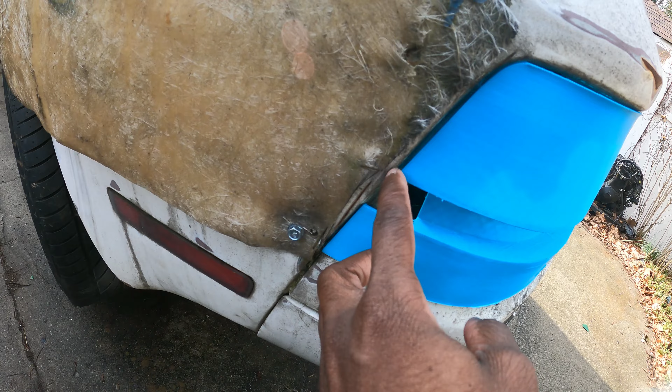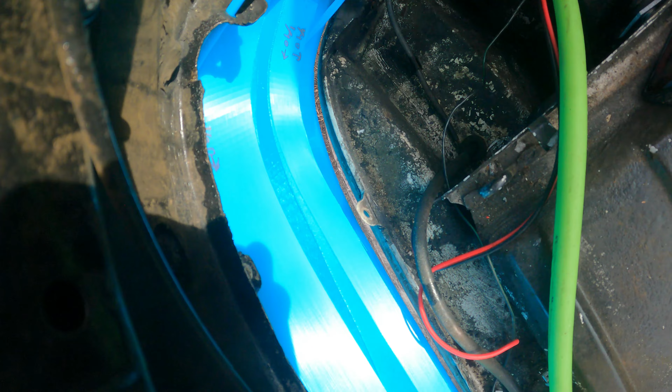So let's go, you can see you are looking at greatness here. Everything I do is greatness, of course. So if you guys remember, long time ago we were actually working on a kind of futuristic design for the taillight scheme. You can see we have a slit here going across, and then I had a center taillight, but it's not here right now with a slit in it. That slit housed a flexible - well actually, I think it was like a straight one - basically like one of those LED light tail bar kind of things for trucks, to give this thing a futuristic straight line look. Again, just like the wide body, bringing it to look more like a 992.

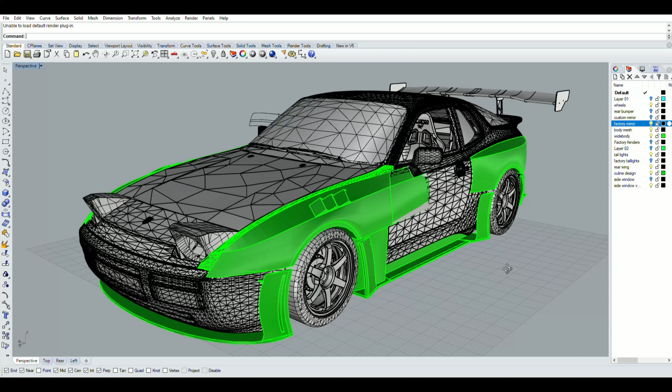So this is basically what we're coming up with. This I think is iteration 5, you know what I mean? Like a little embarrassing, but if I had a 3D scanner it would have been done probably by number 2. So this one is not perfect, but this one is damn near there. So you can see we have a nice 3D printed tail light, obviously to mimic this, except we're going to put our bar a little bit lower to match up with the body lines and the wide body.

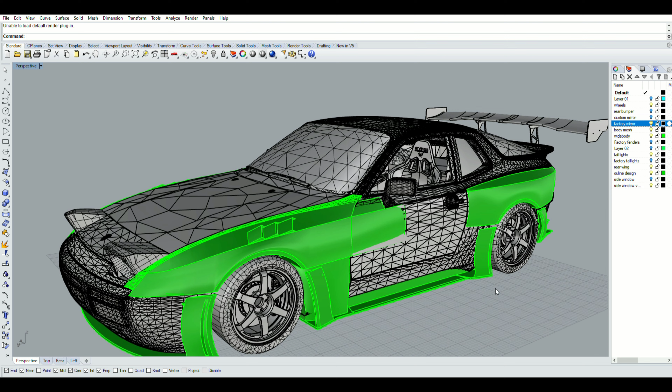So I actually have the strip, I just have to go get it, but you guys will see when it's done. The main goal of this video is to actually print the entire section and basically bring it onto fiberglass, and then carbon fiber, and bring on the molding process. So looking further at this, you can see we have a little air gap here. I'd like to tighten that up.

You can see we have all of our contour lines very nicely. I actually want to bring this edge out a little bit more, but we're not gonna get it super perfect in terms of the 3D print because it does warp and this, that, and the third. So the best thing to do would be to get it as best as we can, and like I said earlier, get it to the molding process.

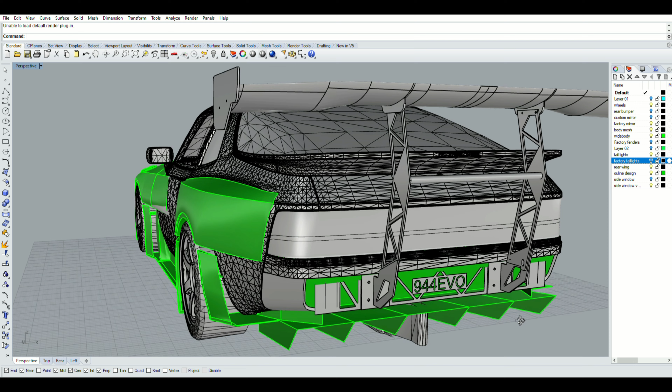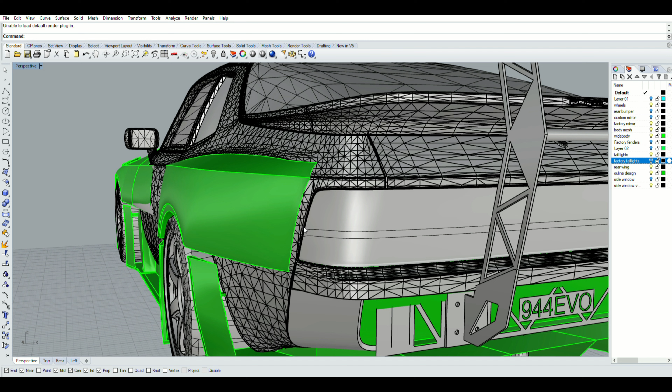So we're gonna fiberglass it and make it one whole piece. That way, if you guys want to actually purchase one of these, you guys can - it'll be a reusable mold. So you can see we have to tighten up this inner corner right here, and yeah, that's about it. You see we have mounting holes, everything's basically lined up, just have to adjust the holes a little bit, and yeah, not really much else to say, honestly. Just have to fix this one up.

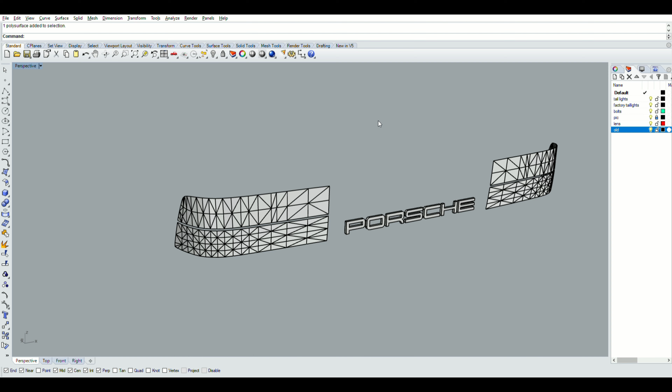I'm almost sure that my next one would be the last one, and then after that we can mirror it to that side, and then from there the center section will be easy. All we do is extend this all the way and take measurements after both sides are in. So without further ado, I guess let's hop on the computer and show you guys what we have here.

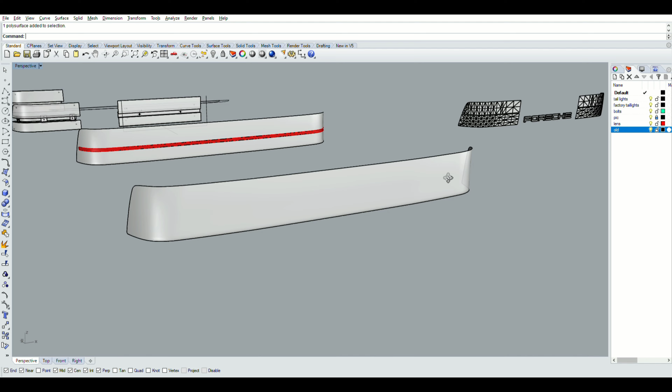Alright guys, back here again, back in our 3D modeling fantasy world. If you guys didn't know, I like to use Rhinoceros 5. Everybody uses Autodesk Fusion 360, honestly I don't see the hype against it. I mean it's cool, but you know, I prefer more abstract stuff like this.

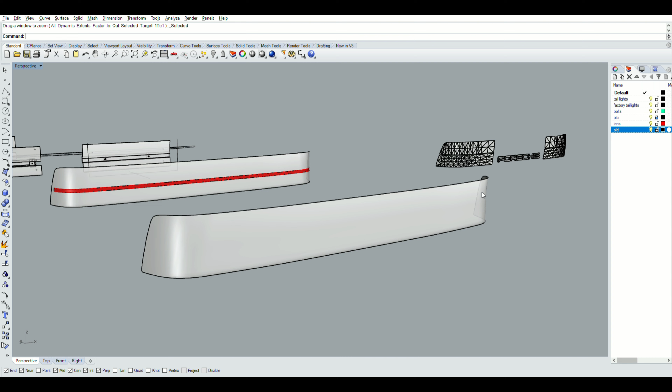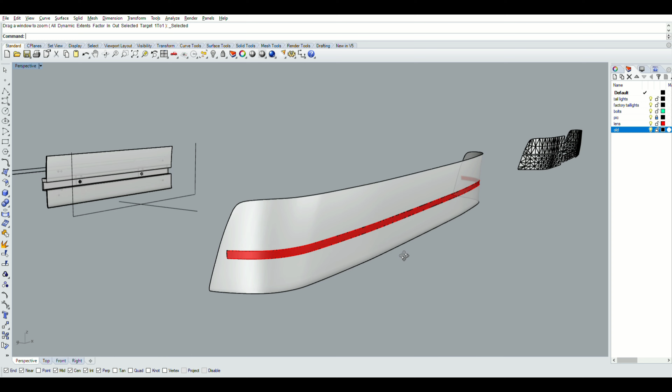So you can see we're bringing the car further into the whole 992 look, and honestly, I'm liking it. Some people may say it looks kind of cyberpunkish, but I like it, honestly. It's gonna be a straight strip just like the 992s. I'm thinking about putting a Porsche emblem here. Think about it, I don't know yet, but we'll see.

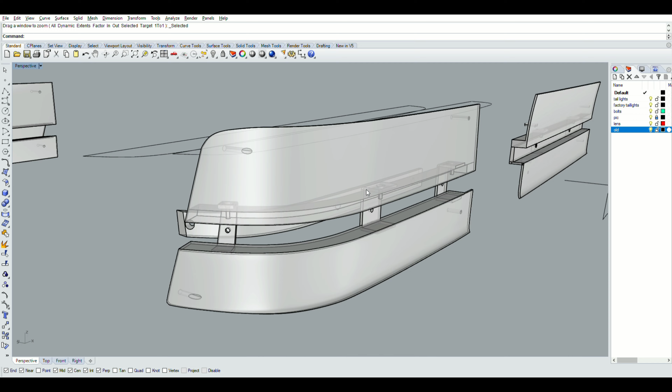These two lines are not gonna curve. I actually don't know why it's curving in the model, but these are complete straight lines, and you can see they will match up with the body lines of these slats here. So honestly, yeah, let's go ahead and isolate this and actually turn this into a real thing here.

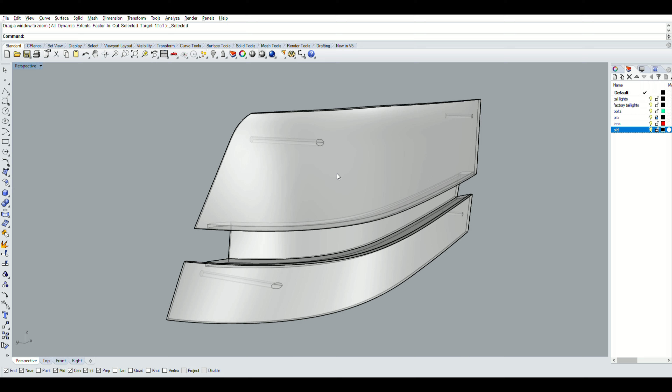Alright guys, you can see we've now isolated everything. This is actually the stock taillights taken from the other file. So with this, you can see we kind of took the whole abstract shape of it and kept the Porsche. I don't know if I'm going to keep that yet, but we'll see. And we turned that into this.

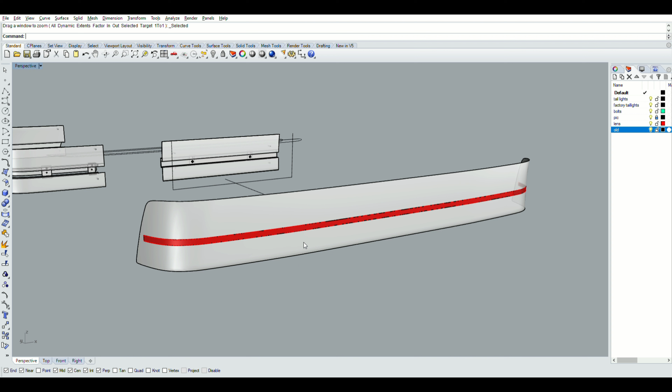So honestly, this is actually pretty cool. We just ripped it apart, made it super simple, made with one giant curved surface. The goal is to actually keep this one surface. I don't want any seam lines, so let's see.

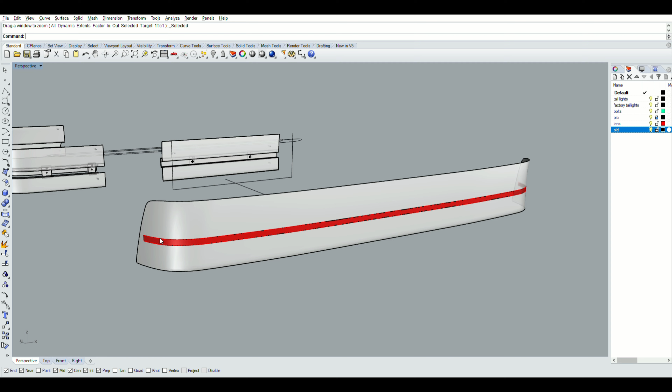After that, we moved on to this here. So this is more or less the look that we're going for, with the single strip, kind of bringing it more to like a 992. I wouldn't mind actually making it like one giant LED strip, but honestly, that's a battle for another day. Lots of complications with that, but we'll see.

So this is more or less the look. Honestly, you can't really see it with the rest of the car, but you guys can get the picture. I'm kind of liking this look. You can see it would curve all the way to the edge, almost to the edge. And yeah, it's actually pretty cool.

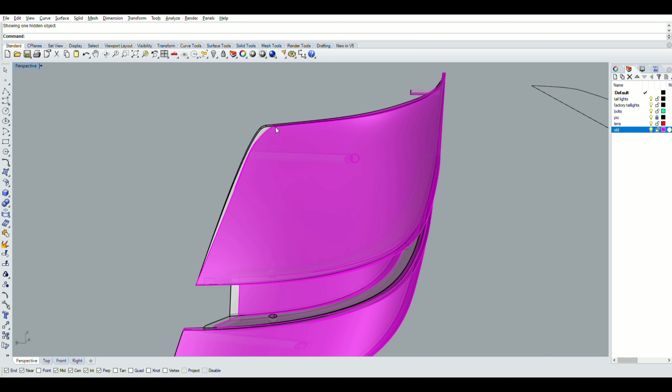So trying to break this down, this is like our stage 1 or iteration 1, I guess you can call it. And this is kind of what it would look like, but honestly this version hurts me more than it actually is functional, simply because it's like a 3-piece thing, and it's a lot more parts, a lot more complications with this.

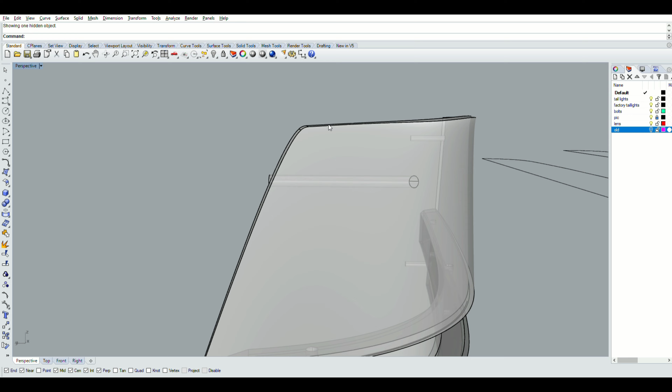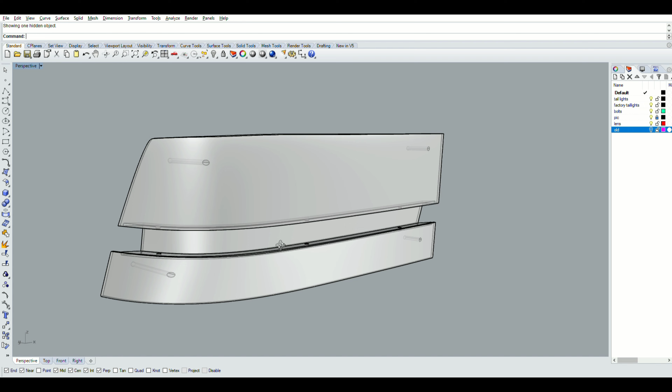So we actually moved it on to a single piece here. With this single piece, you can see we basically accomplish everything that 3-piece model over there does and turn it into something easier. This way I can actually get this to print all one time, all one piece. I know all my measurements are going to be lined up, obviously, because it's all one piece. And yeah, this is more or less going to be the look.

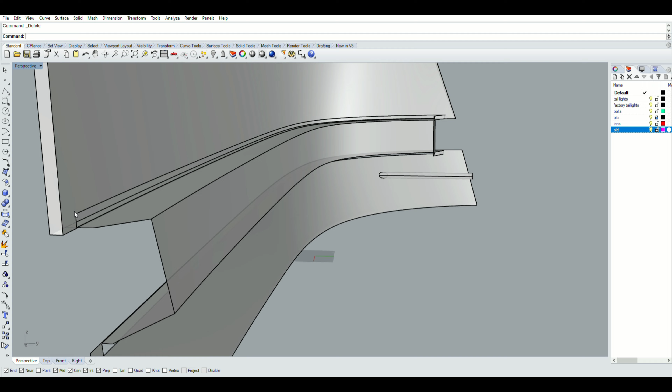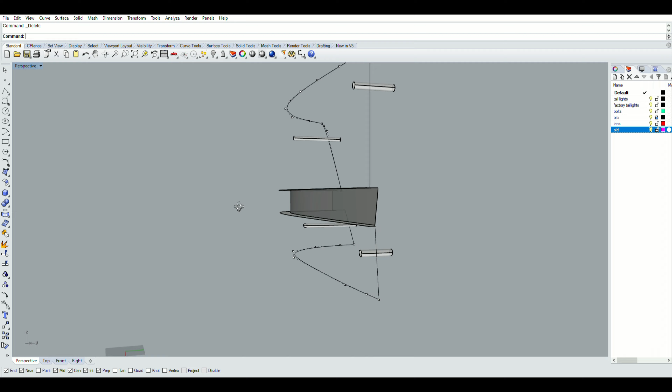So we're actually going to, back to the major one, use a 60-inch flexible tailgate light. A truck tailgate, guys. And we're going to put this in here, and we're going to cover it in kind of like a clear frosted glass to diffuse the light. And I think that will give us a nice look. Honestly, we have to try it to see, but basically it would hide the tailgate light behind it and diffuse the light very, very, very nicely.

So let's go ahead and make our changes, because you guys saw earlier in the clip it didn't really fit us right. So let's go ahead and start this process.

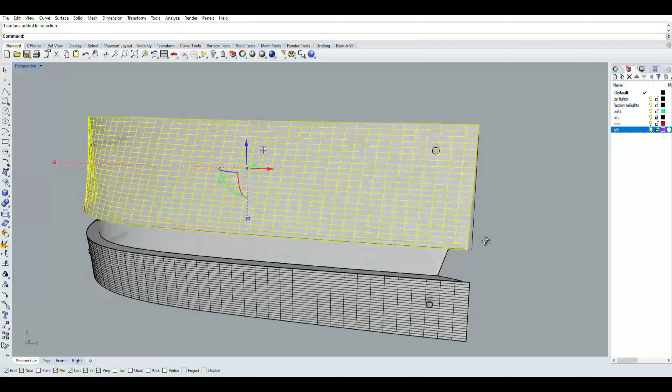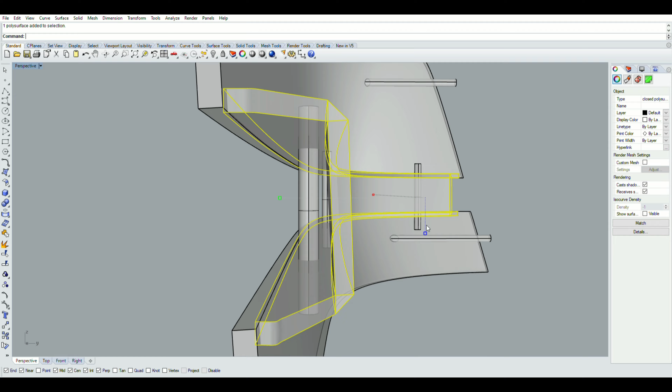Okay, so after all of that, you can see the gray is the new, the magenta is the old. Let me just turn this off so you guys can see. So you can see we actually added a nice little bulge out to it. I feel like because this surface is going to be flat, it's not going to be as extravagant as I want it to be, so I kind of bulged it out a little bit. And we fixed the curve, fixed the edges, fixed a lot of the bolt holes. And again, you can see it is a nice one-piece structure.

So I'm working on how I'm going to get the frost strip in here. It's definitely going to be interesting. I'm going to try a bunch of things, but this is why we model, guys. So let's go ahead and throw this on the printer. Hopefully this will be the last version we have to use, or remake. This will be try number 7, so let's get on with it.

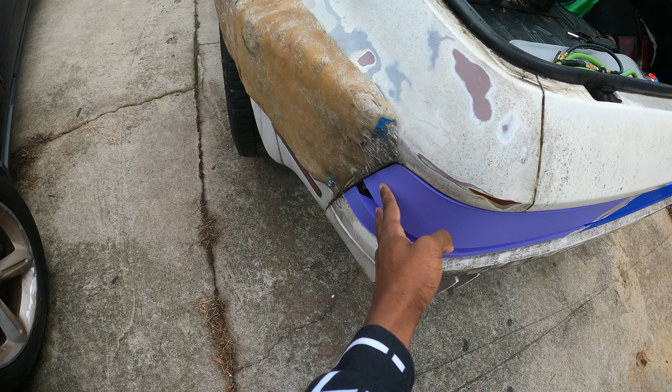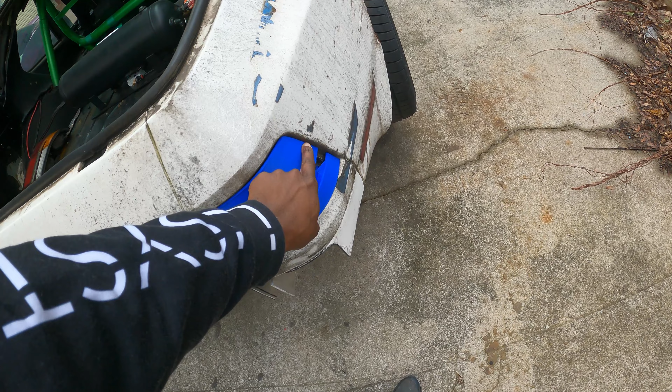Alright, so not too shabby. I changed up a bunch of angles, so now it actually looks like it contours to the car better. Still have a tiny little gap here, I like to pull this in a little bit. Since I changed up all the angles over here, it made over here perfect. You can see on the inside there's little to no air gap now, completely pulled towards the body. Since I did that, it kind of messed up the geometry over here, so all we got to do is just pull this forward a couple millimeters. So at least everything is now uniform and that side is all situated.

So literally my next print will be perfect. With that being said, I can actually print the whole thing now. You guys will get a full look on how it would actually be. I'll try to purchase one full color, so we don't have a full peanut butter and jelly looking tail light. So let's go ahead, take our measurements and get on that.

All right guys, back again, and look at all these pieces we have. Let's go ahead and throw this on, and boom, look at this thing, this thing is just amazing. Now I know I said I was going to print it all out of one color - surprisingly this and this is actually the same roll, just printed a week before. So keep that in mind whenever you're printing, your filament does fade out.

So I printed out this centerpiece, thought I measured it properly. I don't know how I got a gap there. If anything, I should be sanding things down, but I don't know, things are weird, but this thing is on there perfectly, and honestly I'm loving it.

So a couple things, obviously that gap right there. Honestly, if you see this fitment, it's very nice, comes out to the edge and everything. So this is basically mirrored, and I don't understand how that came out perfect. And this is like a little gap. It's very, very interesting, but honestly all of this is good enough to move on to the next step.